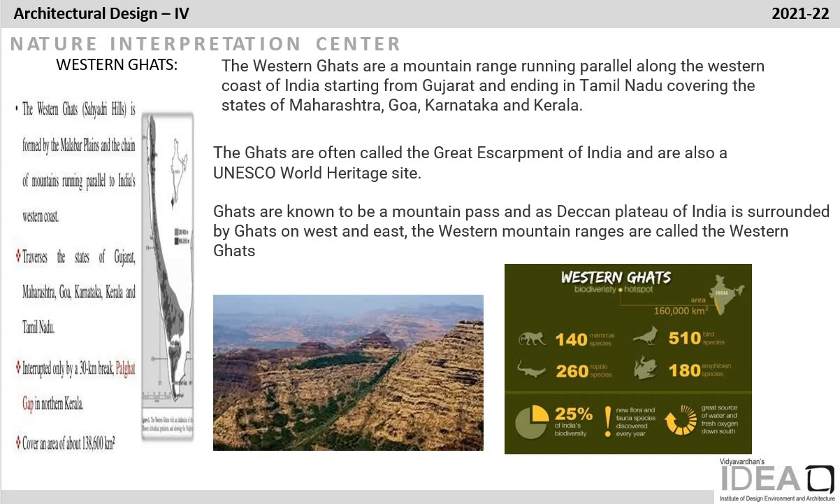What is an Interpretation Center? An Interpretation Center, Interpretive Center, or Visitor Interpretive Center is an institution for dissemination of knowledge of natural or cultural heritage. Its main aim is to promote ecotourism in the city and educate visitors about the necessity to conserve nature, and how it will fulfill protection and conservation.

The Western Ghat needs power to protect its endemic biodiversity, and architecture can help solve this problem by creating clean spaces throughout the area, developing required spaces, and creating educational roles so that nature and heritage can get a boost through spaces where people can share mediums like video, audio, exhibition, drama, etc. Requirements of the interpretation center include the cultural area, interpretation area, administration block, and other areas.

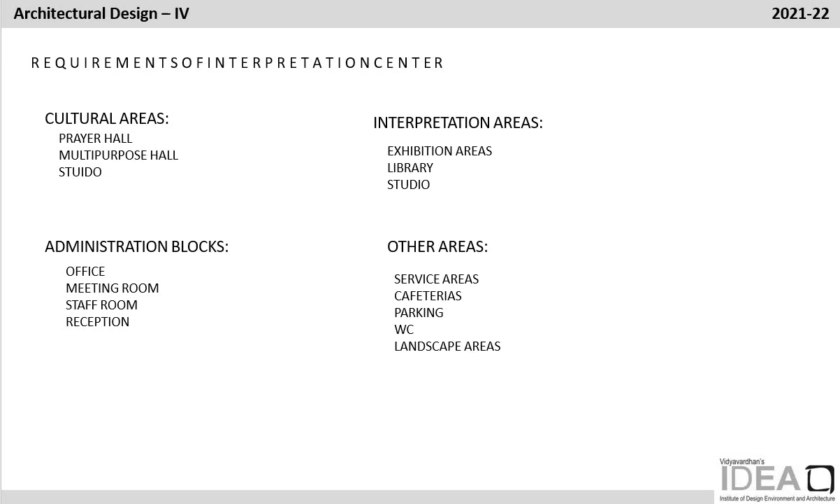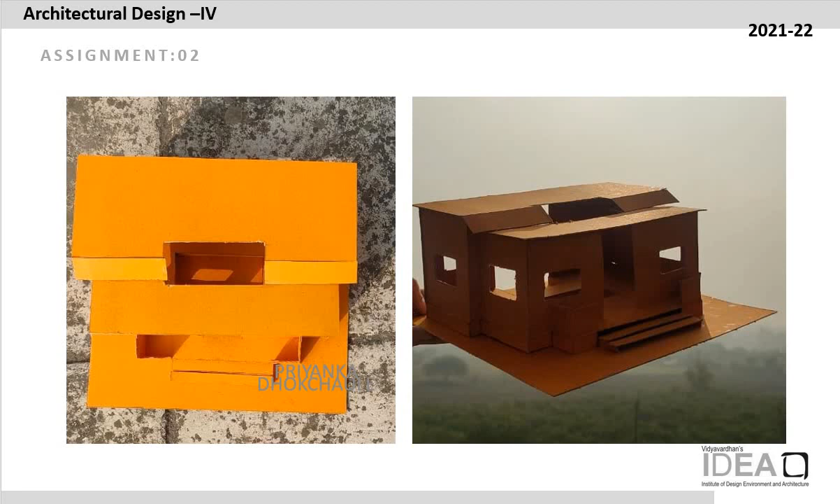The second assignment is space exploration, pre-planning of space exploration. In this assignment, I have explored a singular space with the physical models, so that we can easily understand the different spaces with all the views, which I have mentioned in the next slide.

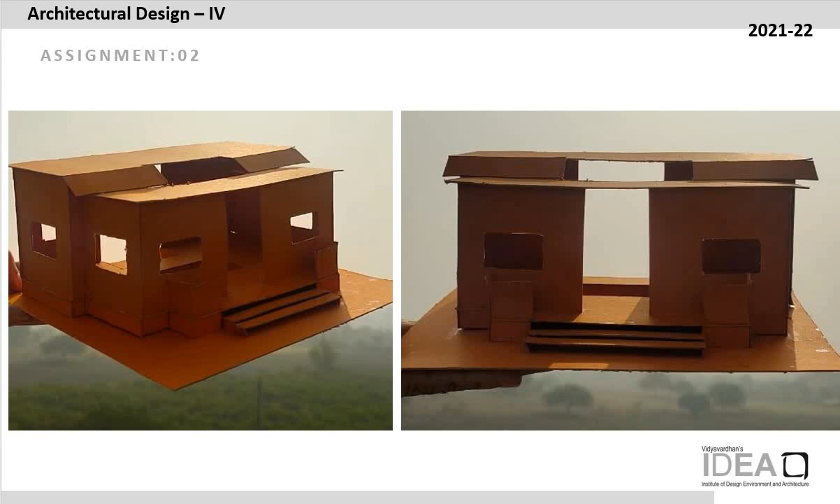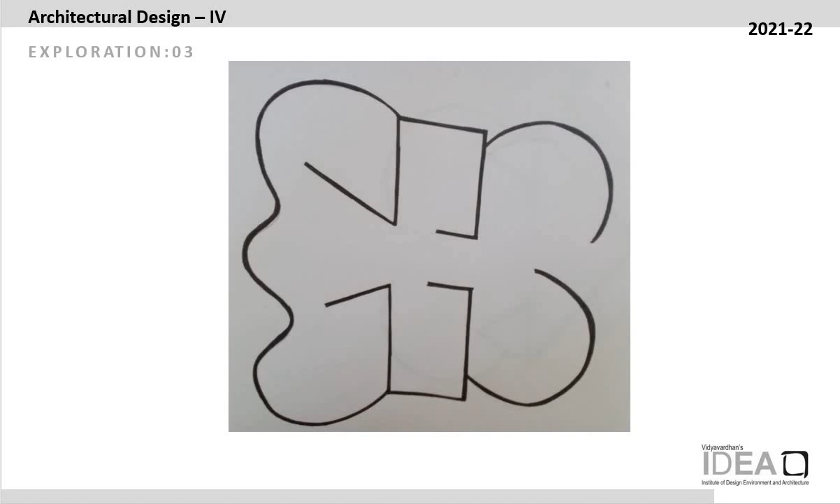The third assignment is form and space exploration. In this assignment, I have taken reference from the previous assignment. I have used geometric shapes to formulate different plans with different geometric shapes, and also created the physical model, which I have mentioned in the next slide.

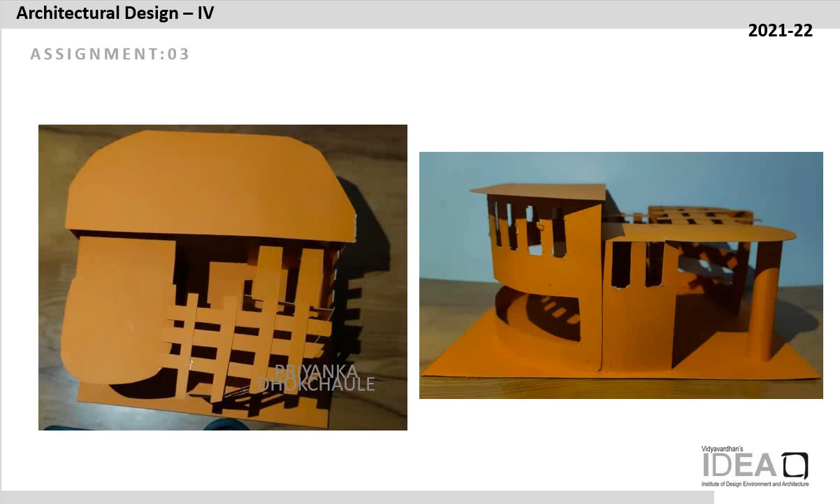Different types of views: front view, and next is the side view.

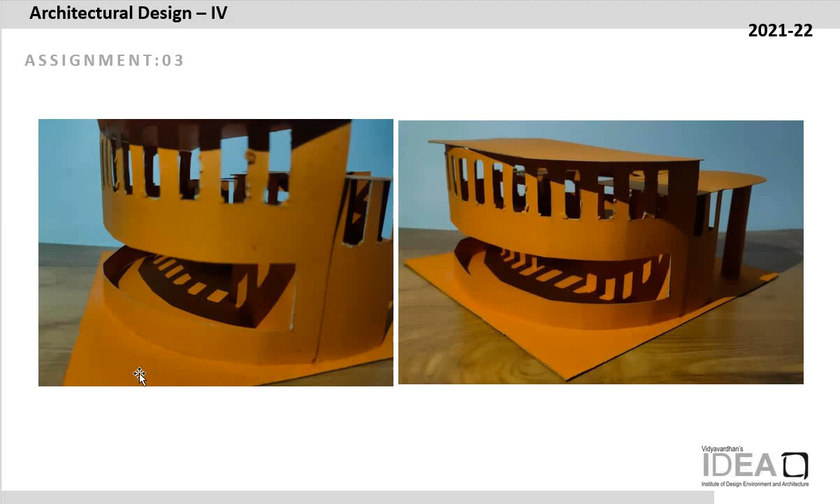Assignment 4 is spatial organization. In this assignment, we have formulated different plans with geometric shapes using significant different architectural planning like cluster planning, centralized planning, and radial planning.

The first is cluster planning. In cluster planning, a parcel of land is used which allows the remaining land to be used for recreation or for the preservation of features or structures with environmental, historical, cultural, and other significance.

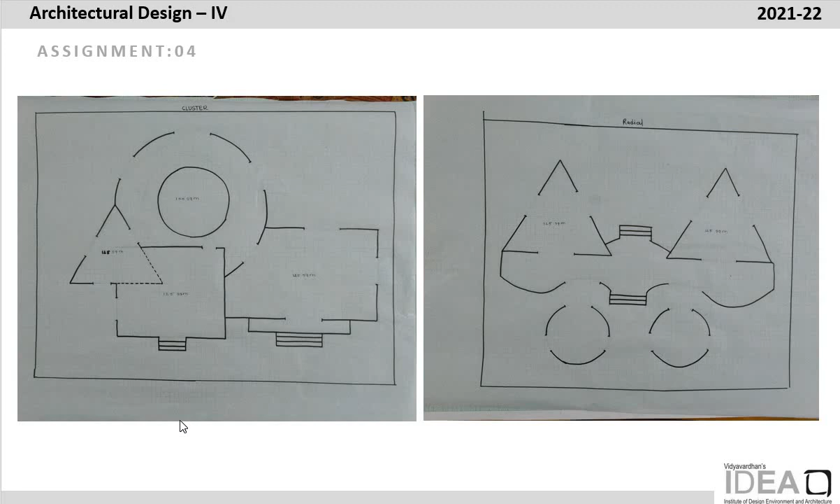Second is centralized planning. In centralized planning, parts of the building radiate from a central point. Last is radial planning, where we can organize visuals with a focus on a center point. It can be symmetrical or asymmetrical.

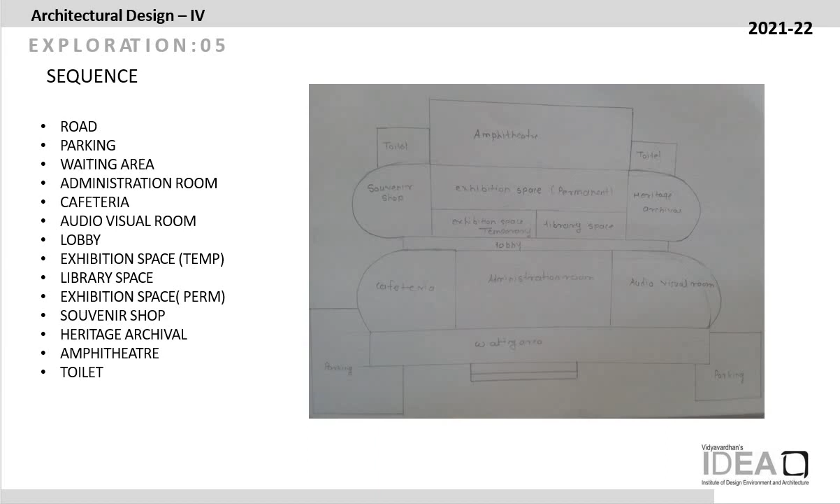Assignment 5 is the spatial sequence. In this assignment, we have studied the sequence arrangement of space in the plan. We also considered volumetric form with the surrounding cafeteria and library space.

Parking is the action of moving a vehicle into a place. The car parking is designed according to requirement, with 160 square meters taken for parking.

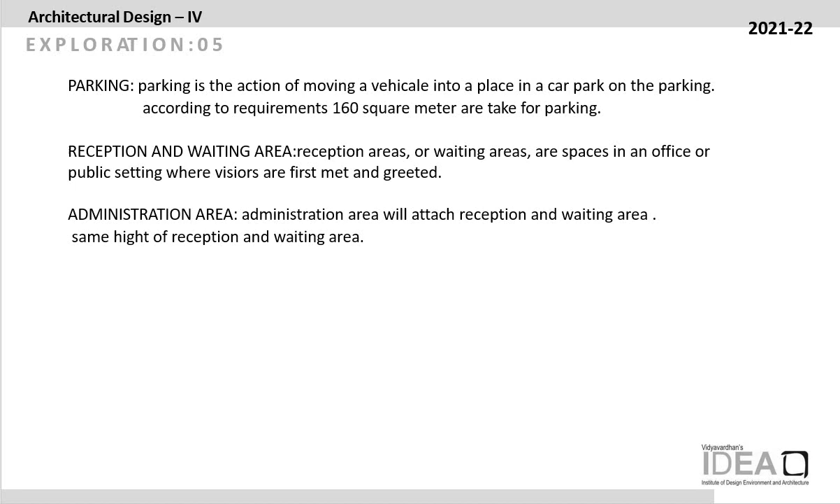Administration area: the administration area will be attached to the reception and waiting area, at the same height as the reception and waiting area. In the next slide, I have mentioned a plan with the entire sequence arrangement.

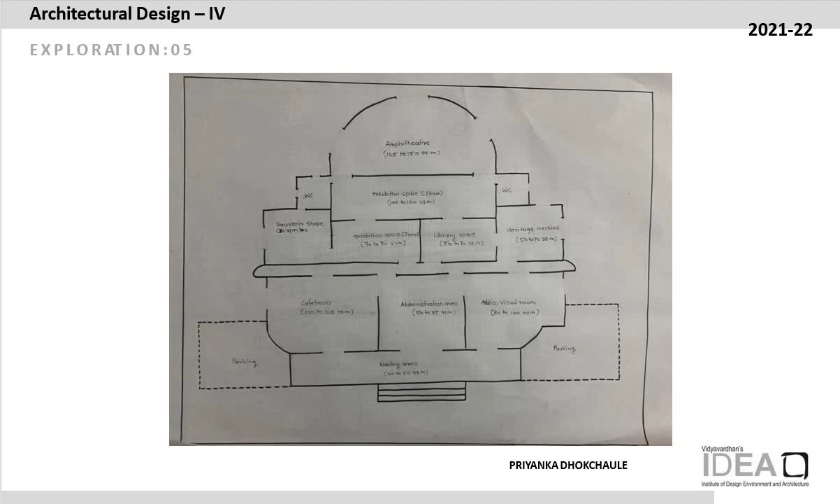Assignment 6 is site analysis. In this, I have explained the site context through different forms of a bubble diagram with the sequential arrangement planning on the site.

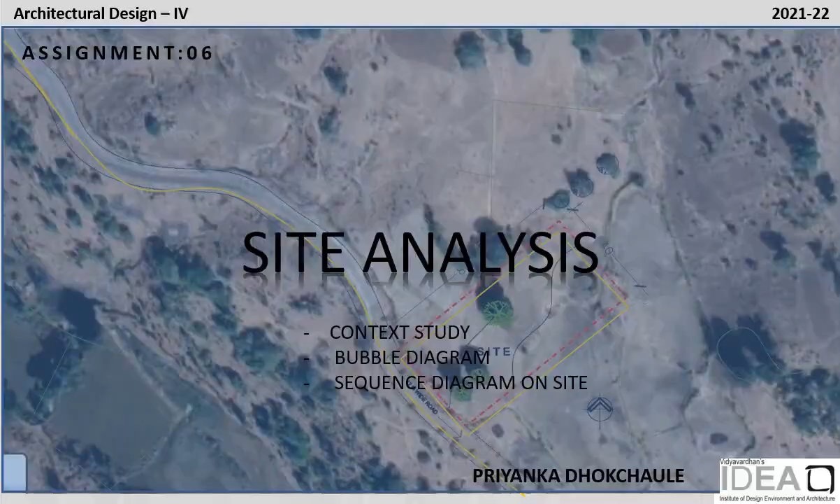Site analysis: the site is 3,200 square meters. There is a 12-meter wide road near the site, and a water body nearby. Site location: Harshwadi, Harihar Fort. Climate: wind direction is southwest and northwest.

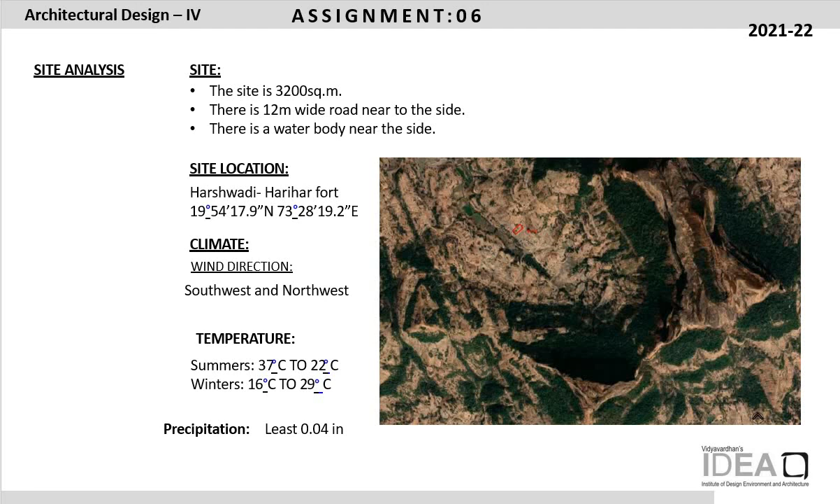Temperature ranges from 37 degrees Celsius to 22 degrees Celsius, and in winter from 16 degrees Celsius to 29 degrees Celsius. On this site, we have mentioned Harshwadi, Harihar Fort.

In this site, we have mentioned the landmark access to the site, Harshwadi, Harihar Fort, with dimensions 40 meters by 80 meters and a 12-meter wide road. There are three trees on the plot and a seasonal water body.

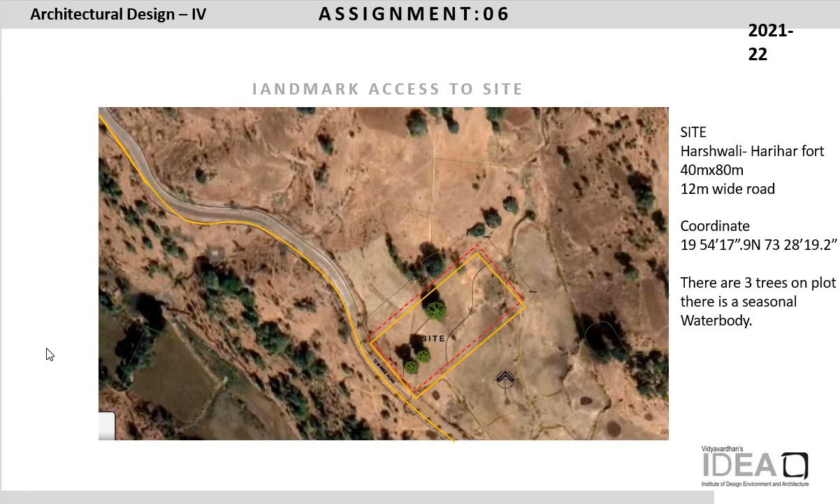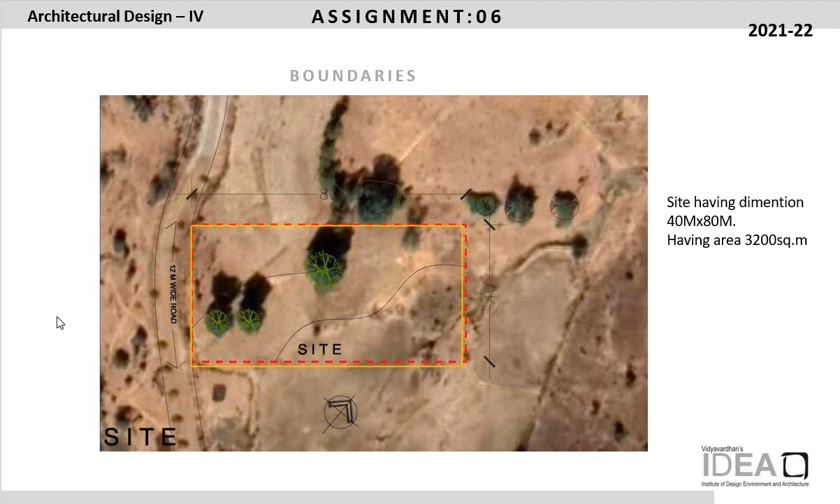In this slide, the boundaries are mentioned; the site has dimensions of 40 meters by 80 meters, with an area of 3,200 square meters.

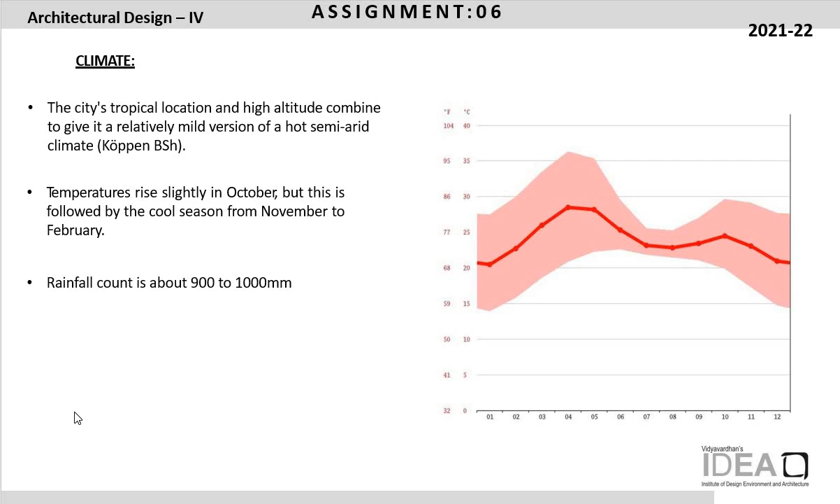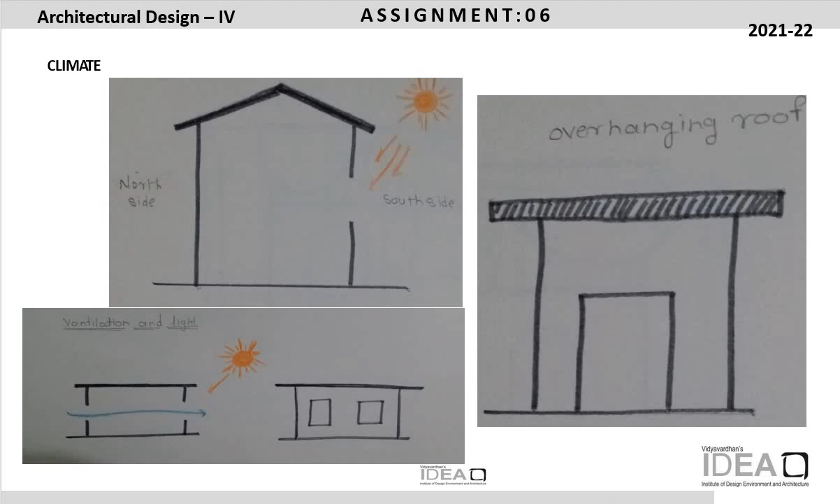In this slide, the overhanging roof, ventilation, and light are mentioned, along with the wind flow. The average wind speed in Nashik is 3 meters per second, with a maximum wind speed of around 8 meters per second.

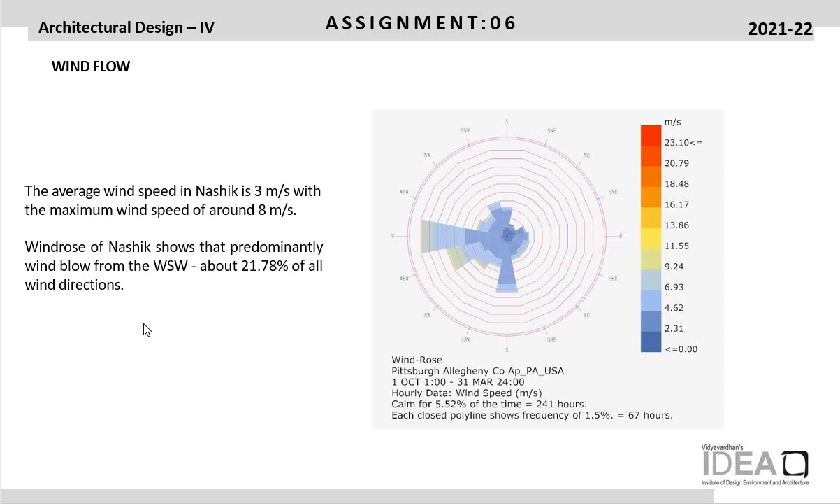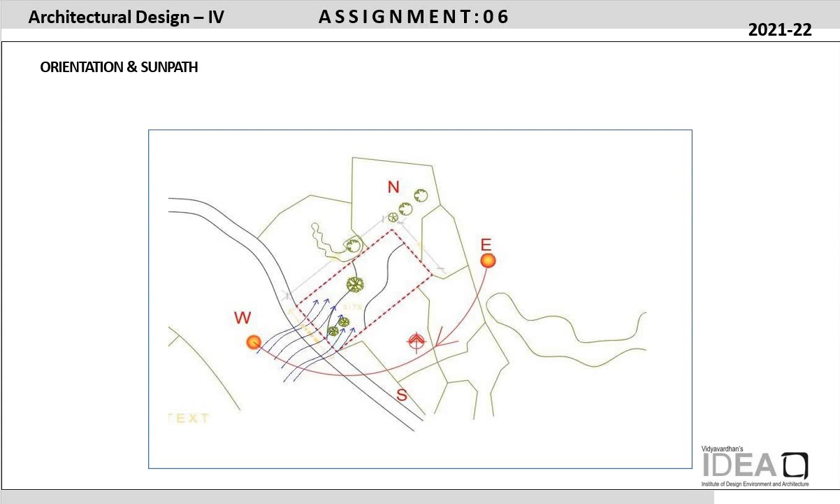In this slide, I mention the orientation and sun path. The sun path direction is east to west, and the wind direction is from the west side.

Pre-planning of the interpretation center and sequence. Volumetric form is the three-dimensional equivalent of shape, volume being the three-dimensional form comprising length, width and depth.

Surrounding elements include trees, shops, road, building, and cafeteria. The cafeteria will have 100 to 125 square meters. There is also library space, with all elements and information in the exhibition hall.

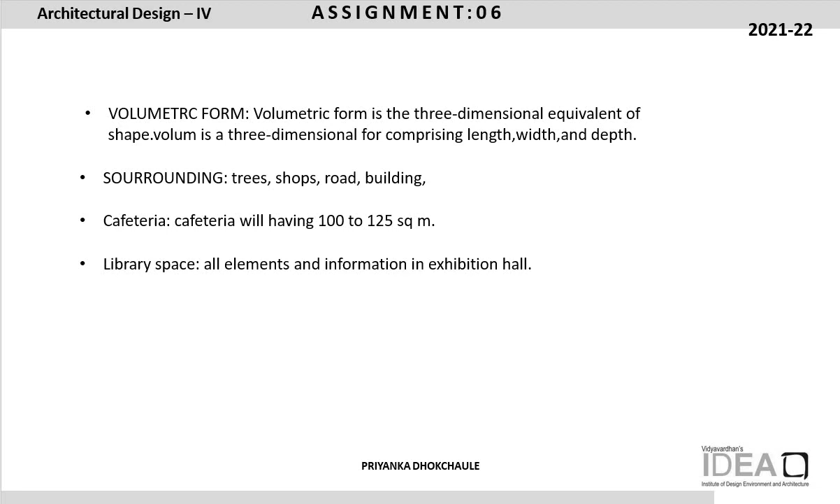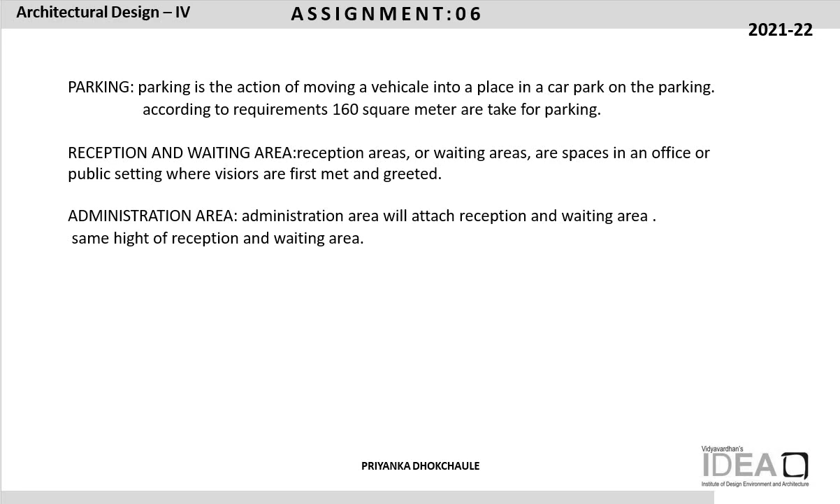Parking is the action of moving a vehicle into a place to park. According to requirement, 160 square meters are taken for parking.

There is a grassland near the site, and also a water body near the site. The technique of construction involves cement, brick and concrete.

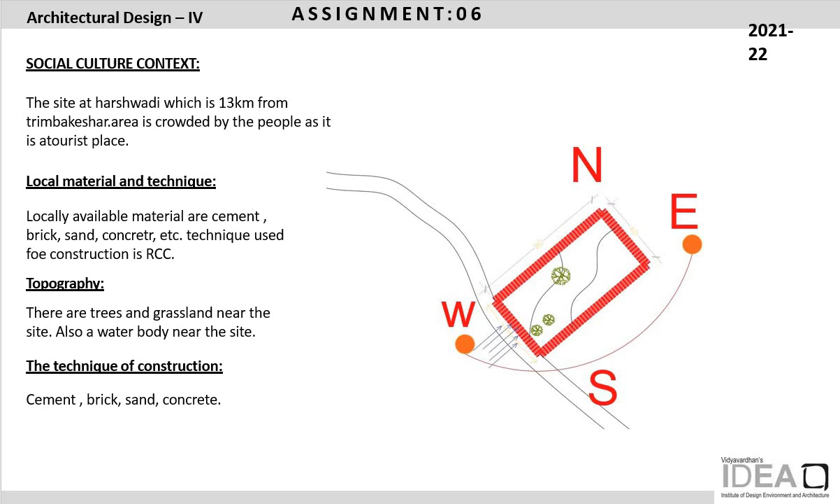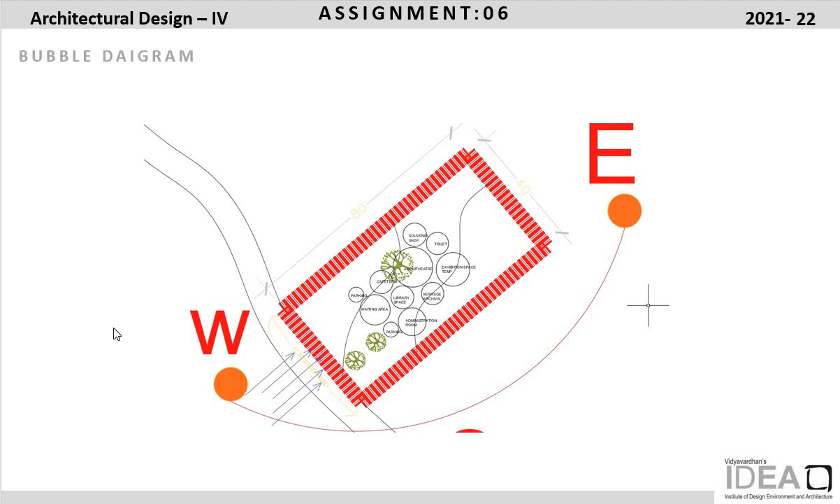In this slide I mentioned the bubble diagram. The bubble diagram shows a sequential use of climatic conditions, wind direction and ventilation.

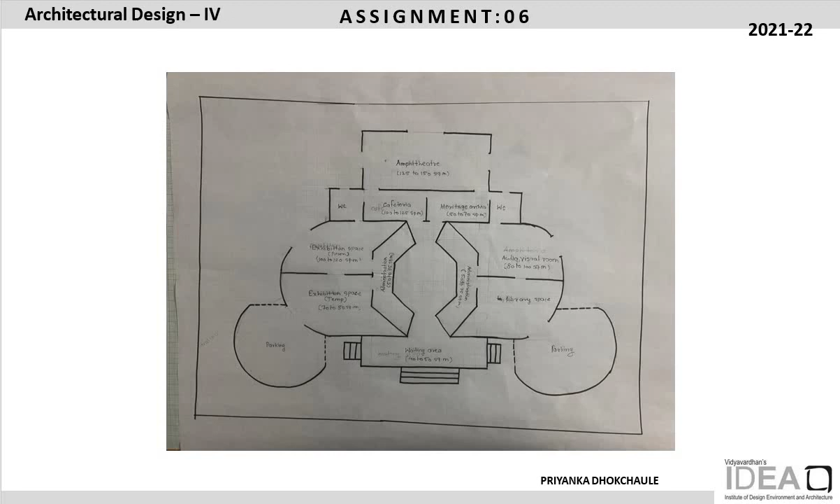First, examples of the plan of the sequential interpretation center. Second plan. Third plan.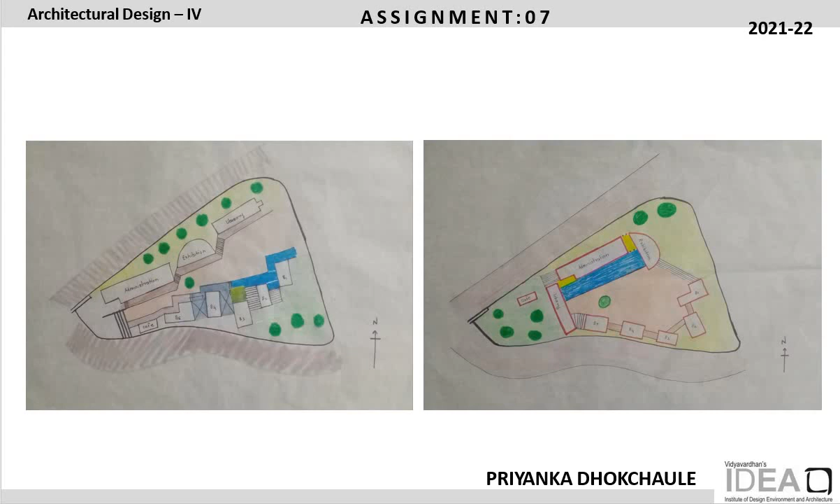The seventh assignment is reorganization of space, based on the Porto School of Architecture. We rearranged the given shapes into different sequential orders, and also formed a traditional spatial pathway.

The next assignment is a case study. In this assignment, I studied the contemporary Galicia Center of Contemporary Art, covering the type of project, intention, and museum.

Auditorium. Location: situated in the Spanish city of Santiago de Compostela. The Galicia Center for Contemporary Art was developed in 1993 by architect Alvaro Siza Vieira. Climate: hot and humid.

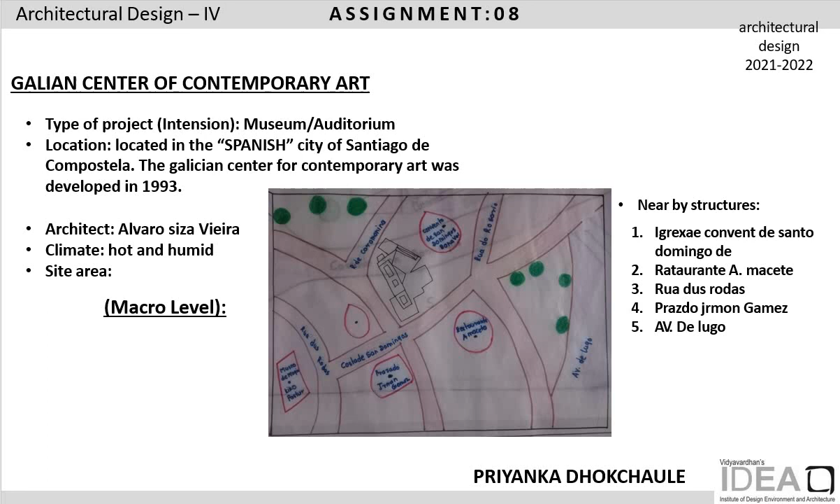Site area at macro level. Nearby structure: the Igrexa e convento de Santo Domingo. I have mentioned the sun path as east to west, and wind direction southwest, from October to March, and winter wind from April to

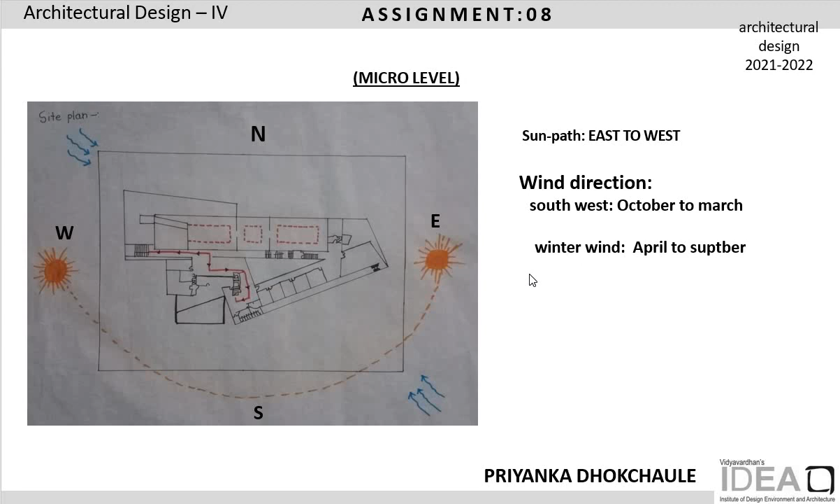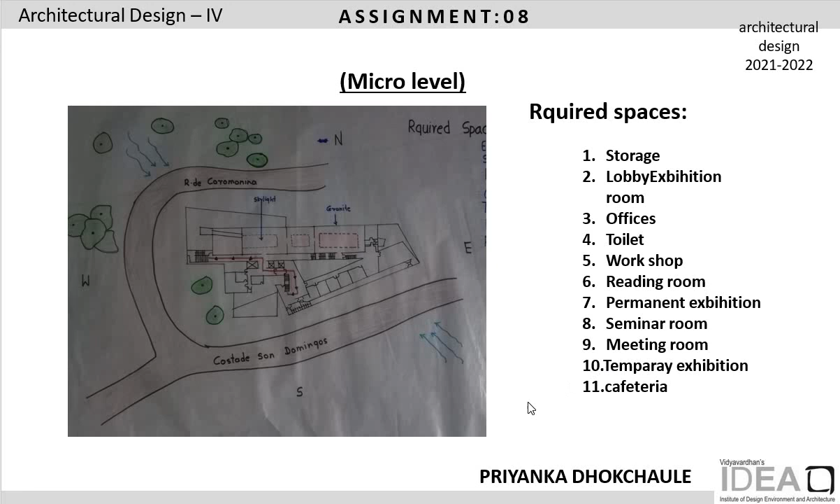September. I mentioned in this slide the micro-level required spaces: storage, lobby, exhibition room, office, toilet, workshop, reading room, permanent exhibition, seminar room, meeting room, temporary exhibition,

and cafeteria. In this slide I mentioned the sections: first the semi-basement section, second the ground floor section, and last the first floor section.

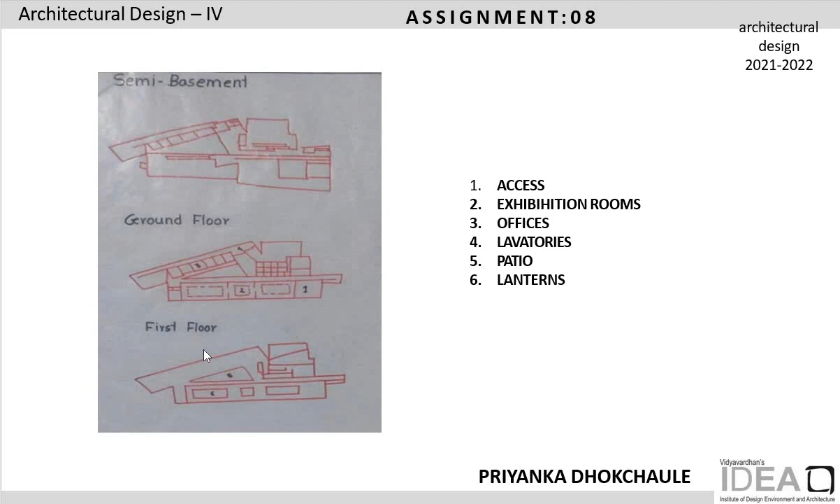In this slide I mentioned the program: the building is built around an axis, with open interior space as if it were a choice, constrained by high walls externally and internally flooded with light.

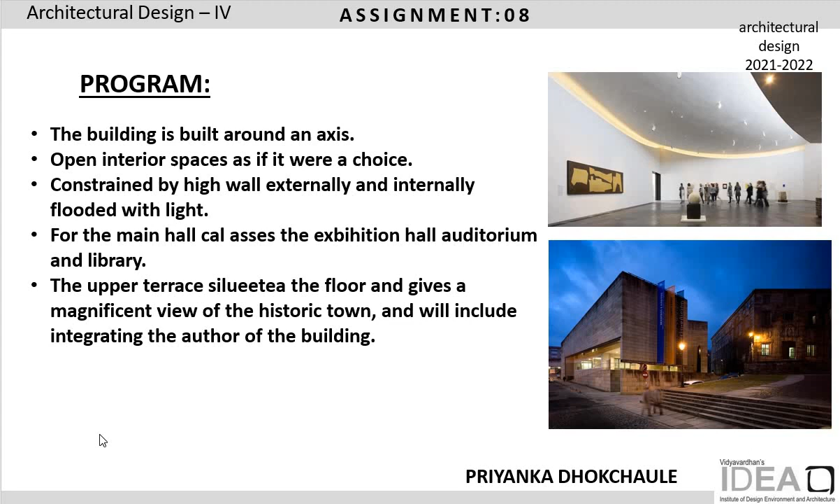For the main hall, access leads to the exhibition hall, auditorium and library. The upper terrace accentuates the floor and gives a magnificent view of the historic town, integrating the author of the building. I have mentioned the micro-level plan.

In this plan, the materials used are granite, marble and wood, with a sobriety that allows a clear reading of the volume. Climate: hot and humid.

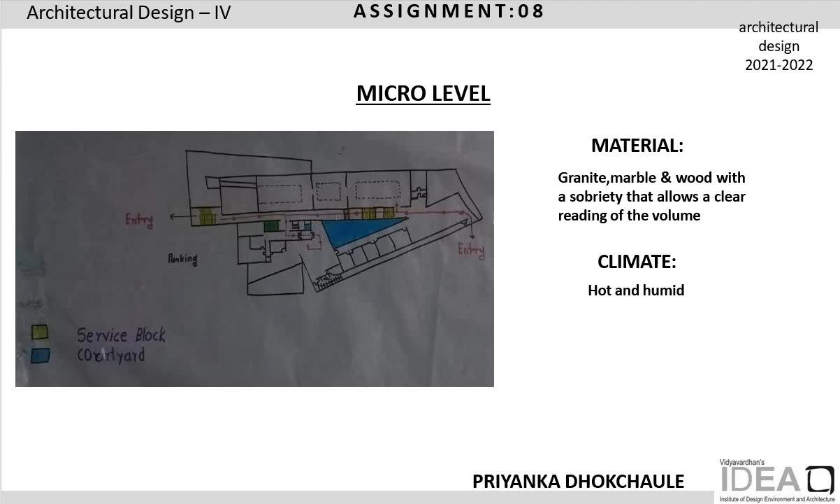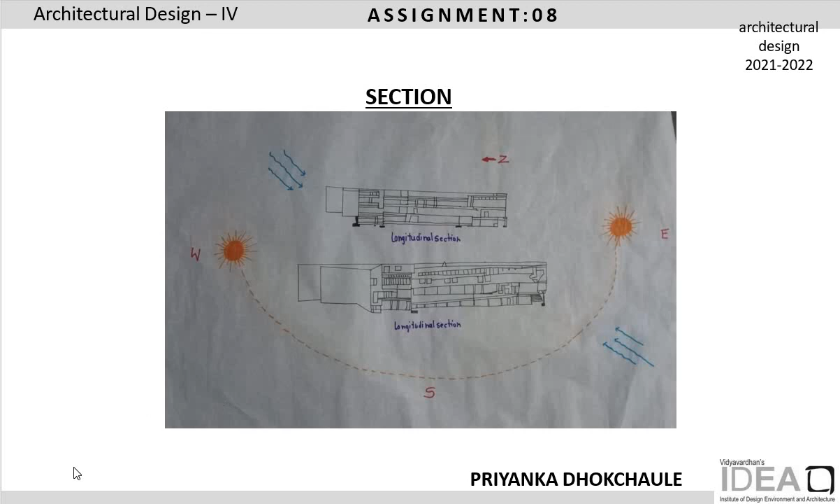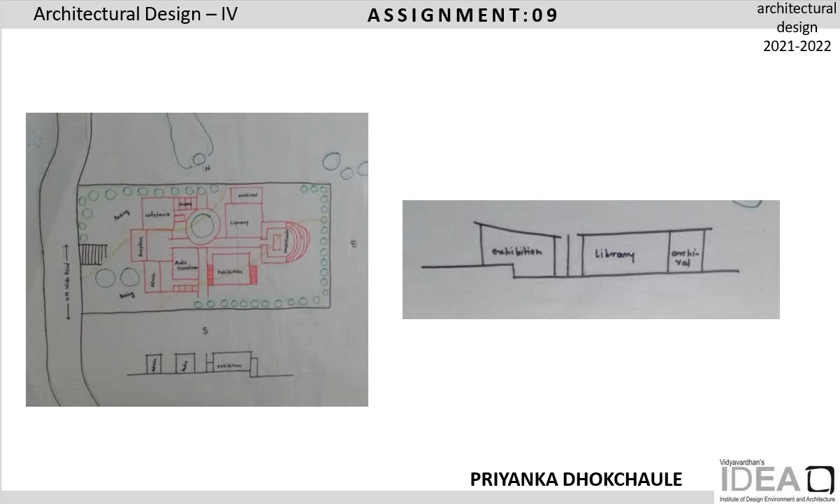The ninth assignment is a single line plan and sketch section. We explored the single line plan along with sketches of sections, and reworked the previous plan to come up with this design.

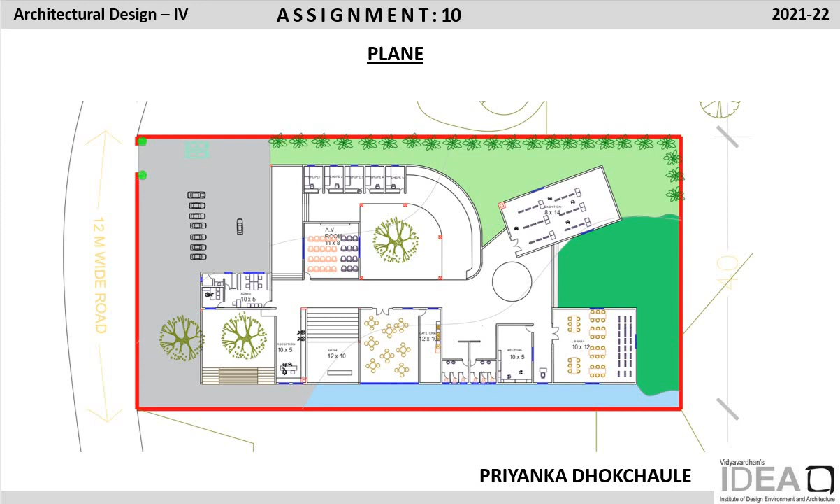The next assignment is the nature interpretation center. In this assignment we stepped ahead with a double line plan and sketch section. I divided the plan into parts with a centralized shape in between.

Next is the section plan, showing the section given in this plan. The sun travels from east to west and is tilted towards the south direction.

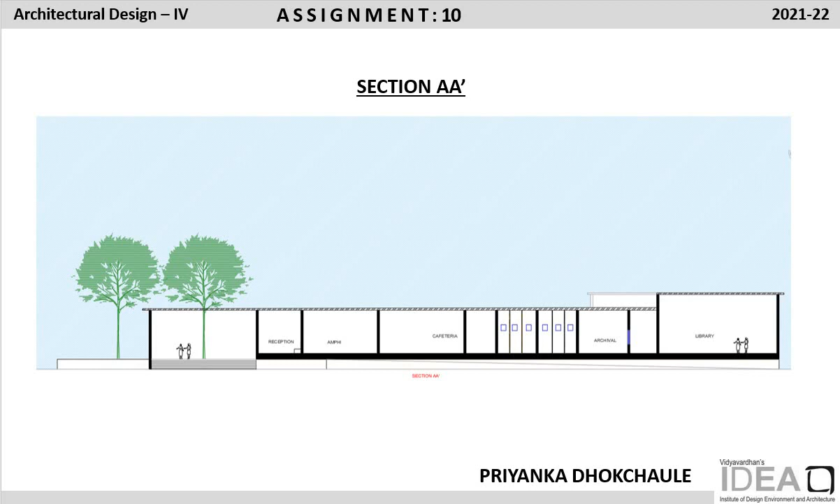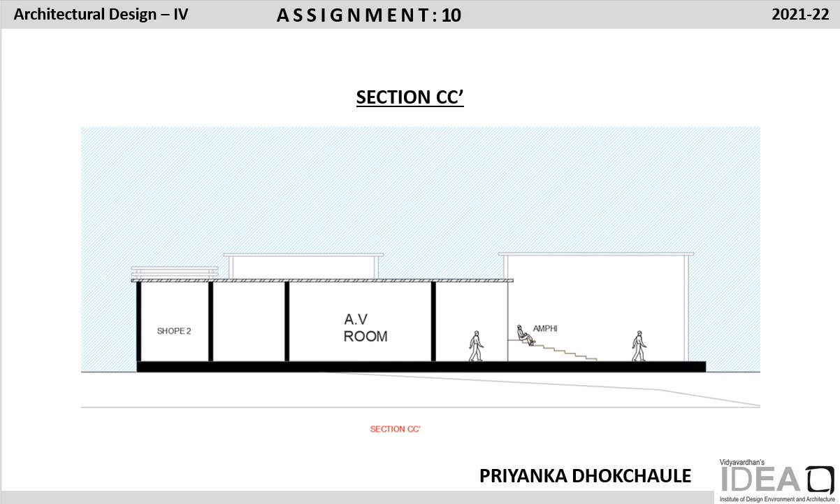Section A-A: the first section is cut from the toilet. Section B-B: another section is cut from the courtyard. The last section is cut from the amphitheater.

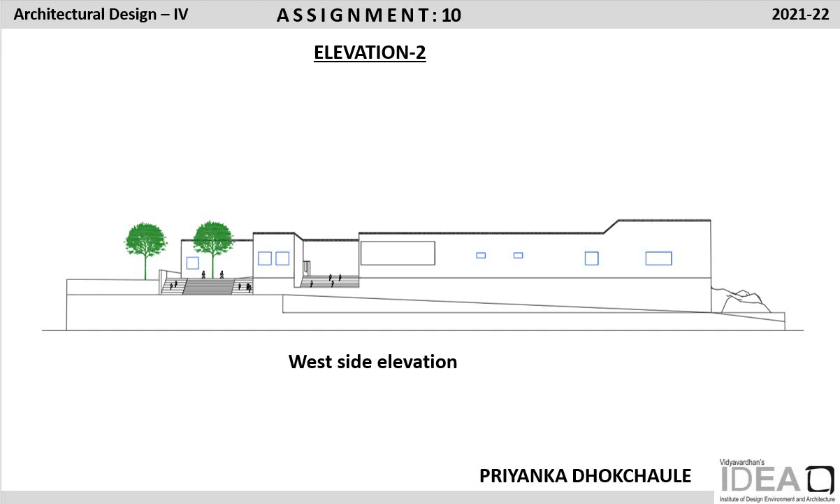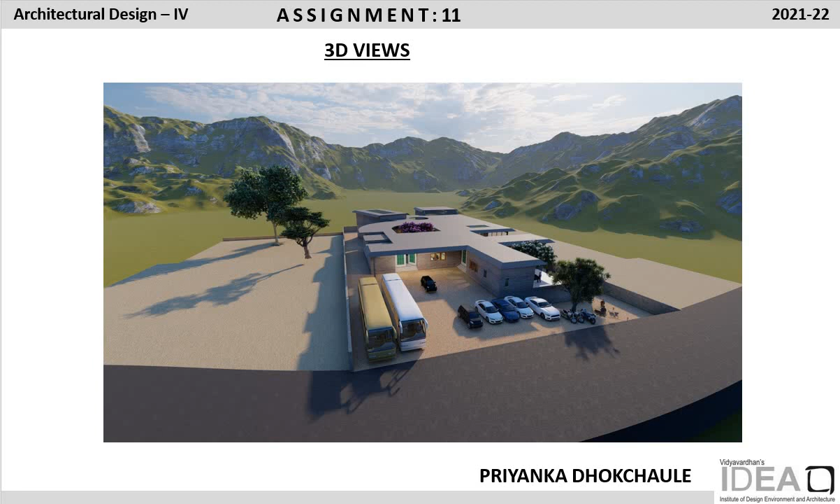Assignment 11: 3D views. Next, I have given the 3D views from the model.

In the first view, I have shown the entrance and the skylight with the courtyard, as the Western Ghat lies on the southeast side, allowing a view of the scenic beauty of the Western Ghat.

I have planned the cafeteria and amphitheater on the southeast direction, and I have given the parking in this view.

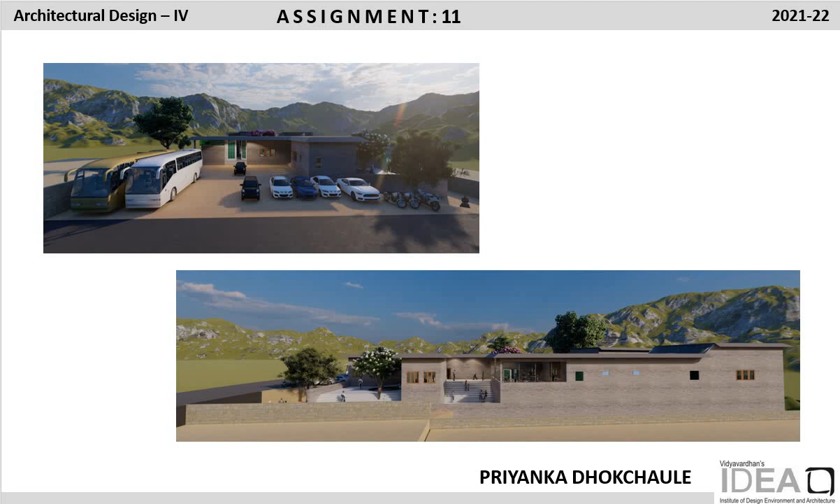In this second view, we can see the cafeteria and amphitheater space. I have given a small hillock for landscape purposes, and in the second view I have also given the courtyard.

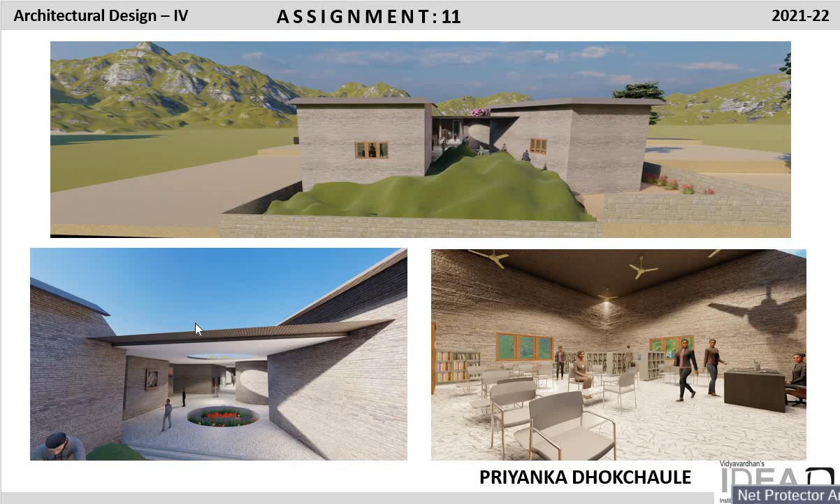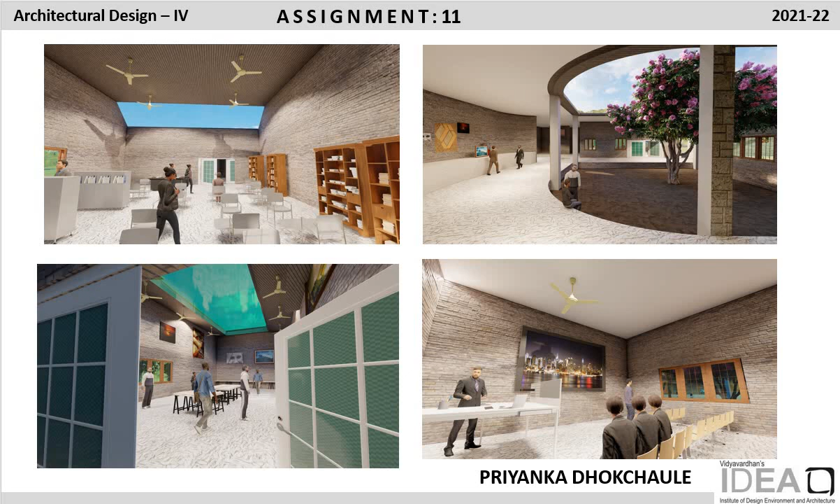In the third view, I have given the interior of the library space. In the next slide, I have given the courtyard in the middle, and in the next view, I have given the skylight in the permanent exhibition.

Next view, I have given the audio visual room. I have given the courtyard in the middle which gives ample light to the objects or paintings placed in the

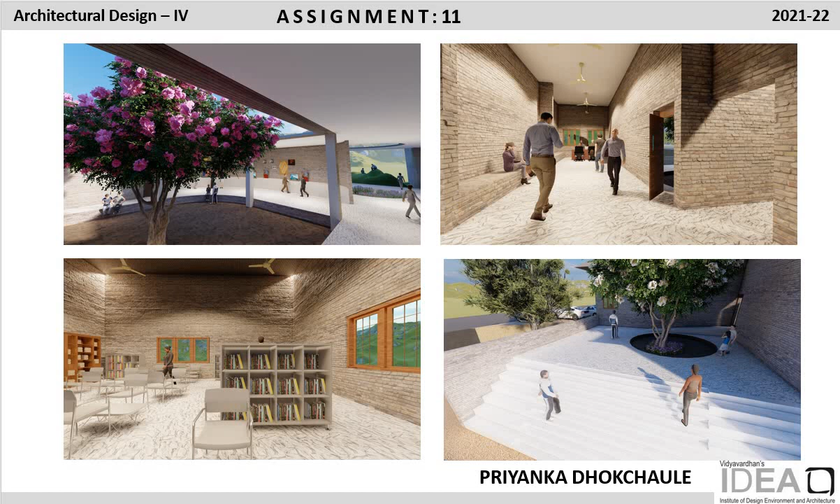temporary gallery. These are the informal seating areas that I have designed for taking in the view of the Western Ghat.

In the last slide, I have shown the waiting area, and in the next view, the admin office. Thank you.